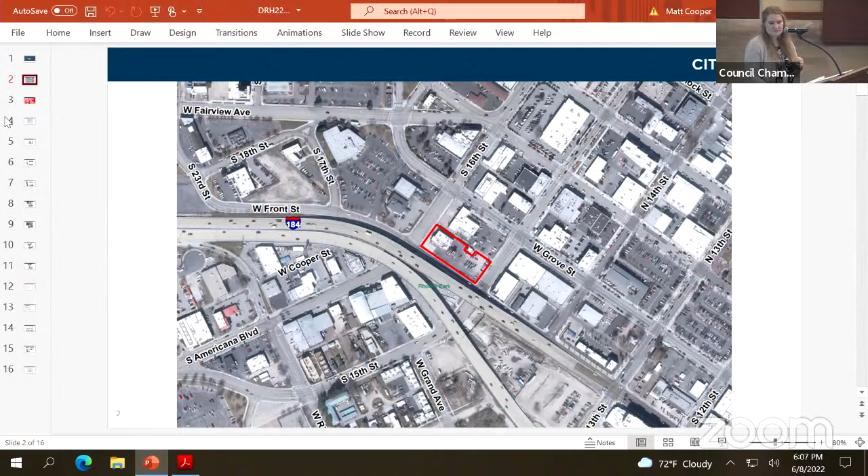The staff could please make their report. Thank you, Mr. Chair and committee members. This is an application for a new 2-story fire station, located at the northeast corner of West Front Street and South 16th Street. The property is in the downtown planning area. The existing fire station building is being replaced by this new building.

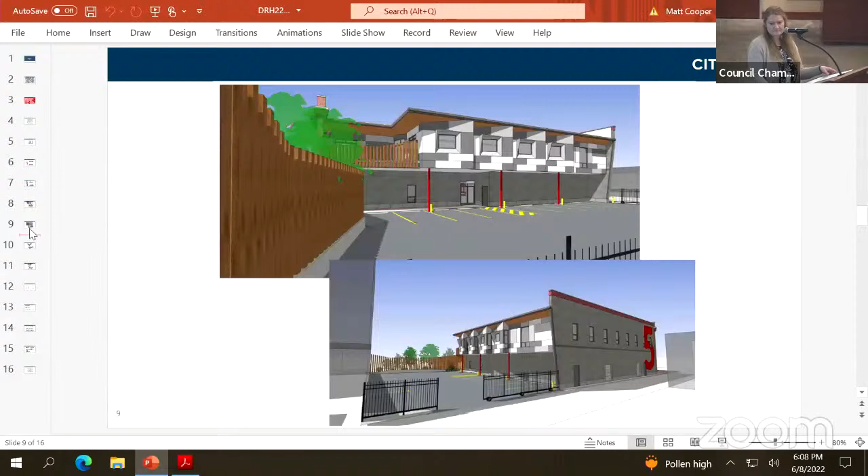Looking at the site plan, the fire apparatus bays are taking access off of 16th Street, and there is some surface parking on the east. The building design and materials include some traditional as well as contemporary details that reference the original historic building. With that, I will leave it up to the applicant to give their presentation.

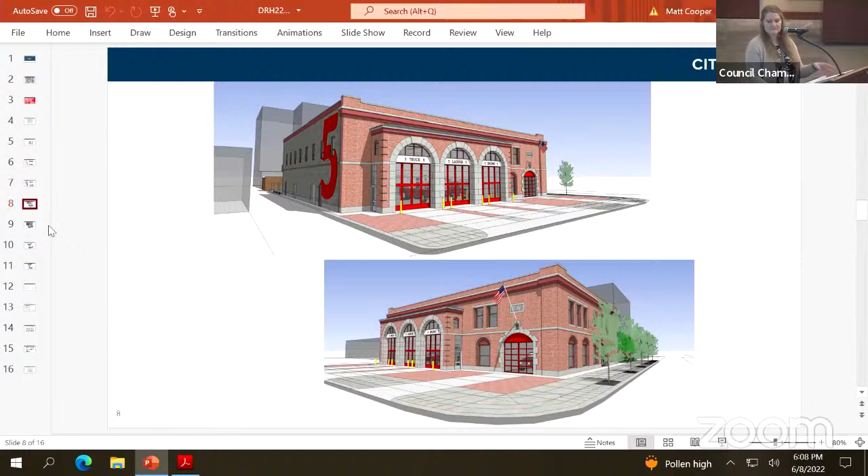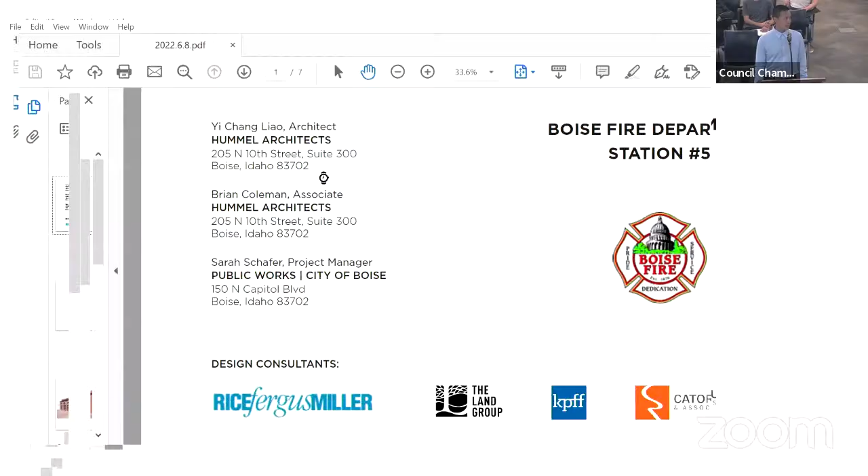If you would give your name and address before you get started for the record. Thank you, Mr. Chairman and members of the committee, and thank you, Kathleen, for the introduction. My name is Yi Chang Liao from Hummel Architects. Address is 205 10th Street, Boise, Idaho. We also have Brian Coleman, associate of Hummel Architects, and Sarah Schafer, the project manager of Public Works, here tonight.

Next, please. So as you know, the project is located at 16th and Front Street. Due to the limited size of this project, the apparatus bay has to have backing for 3 fire trucks.

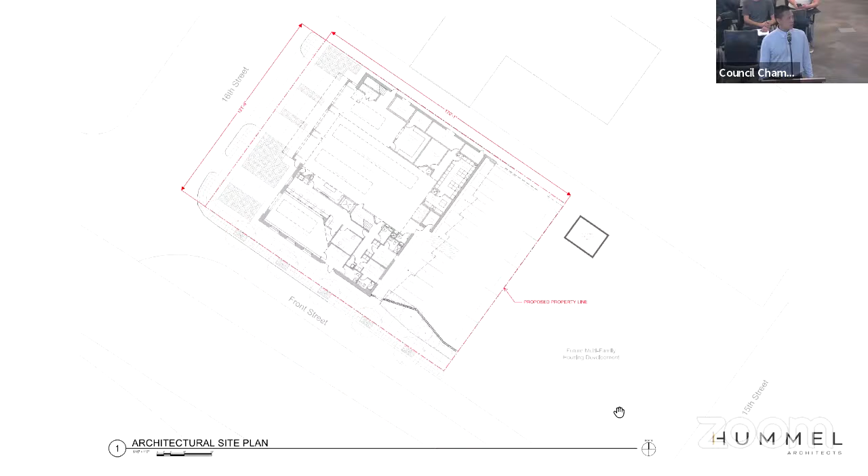So the fire crew is seeking to evoke the memory of the old central fire station. The frontage of 16th Street and Front Street has a familiar brick pattern, and the rhythm of the windows and arch openings brings back the memory of the old central station. At the busiest corner of this junction, it also has a public display hall housing an antique fire engine with several artifacts. This will draw public visual interest, and it integrates with a herringbone brick paver to serve as a public civic plaza.

Next, please. On the interior side of the lot, on the second floor, there is a residential space for the fire crew, as well as a barbecue deck. The contemporary material of two-color fiber cement board will make coherence with the future adjacent housing development.

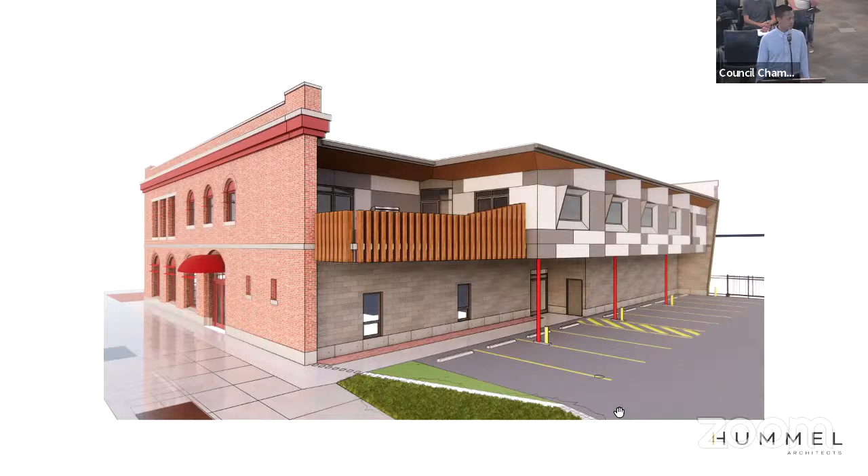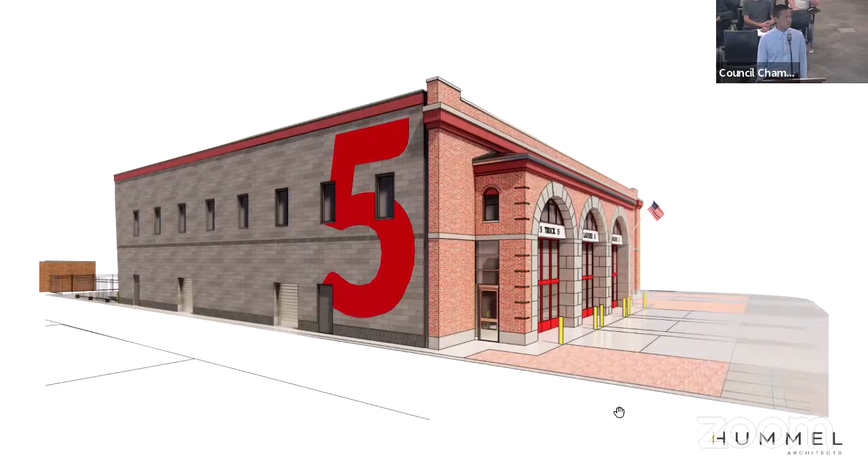This is our first attempt to address the staff recommended conditions. Given the limited size of this lot, we try to reduce the burden on the fire crew. We will locate low shrub landscape planters in front of the historic display hall. Also, to prevent obstruction of visual light in front of the bay, we will only place a historic light along 16th Street. On the interior lot of the site, we will push the property line 5 feet over in order to have a landscape buffer between the future mixed-use development. This is our presentation, and thank you, and open for questions.

Thank you. Is there any questions for the applicant or staff? Mr. Chairman. Yes, sir. I've got a lot to say about this, but I think a lot of it is really not so much questions as commentary. What drove the decision to have the station face out onto 16th versus Front? And why?

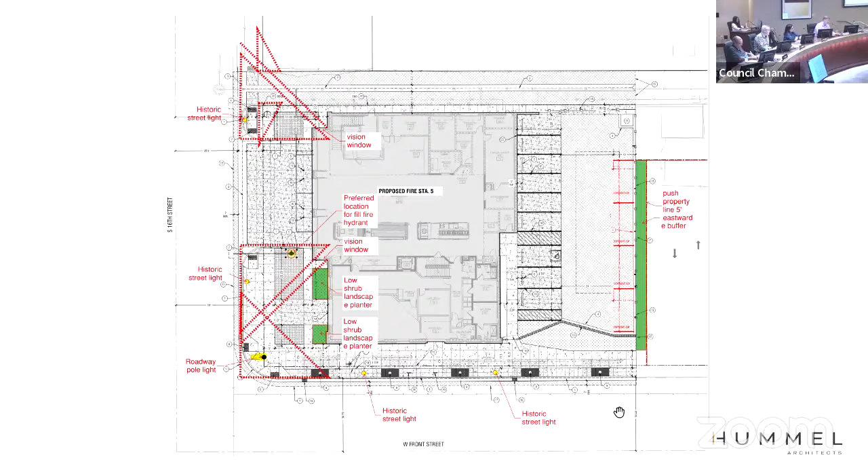I'm not sure which question there is - like I said, a lot of this was more commentary than questions. But I think there's just a lot here that is not up to snuff. I don't think this adequately addresses some of the challenges that this neighborhood has. And we've got this plaza out front that is pretty much desolate, without anything to make it habitable. I guess there's a low shrub landscape planter, but otherwise it's just pavement, which is barely an improvement on what's already there. I guess it's better than cracked asphalt, but...

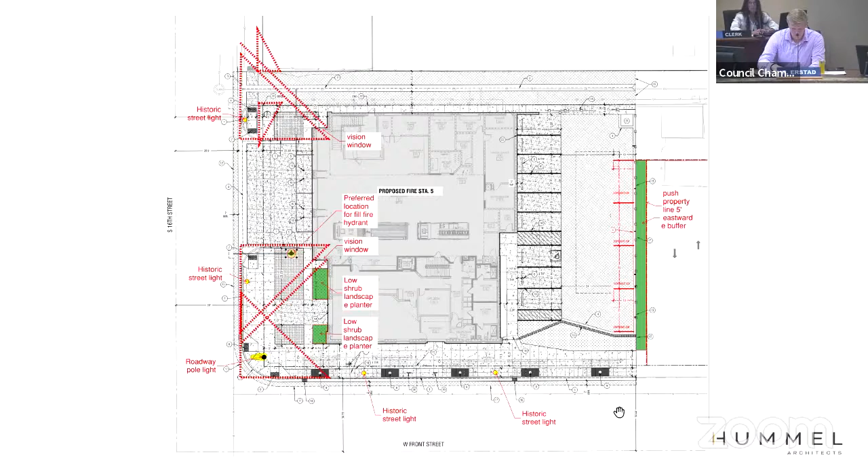I'd like to hear what other members of the committee think about this. I'll go ahead and let the applicant respond to your comments.

You mentioned the surface parking - due to the undetermined mixed-use housing units beside it, in the future it might play a role with future development. You probably won't see it for now.

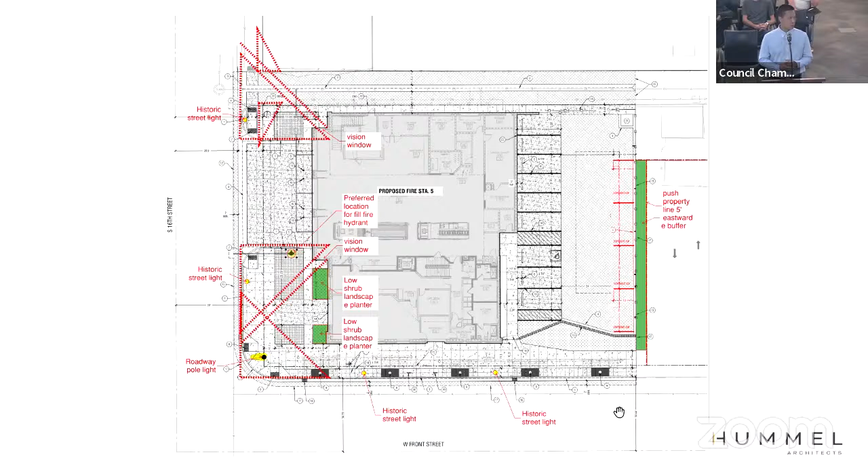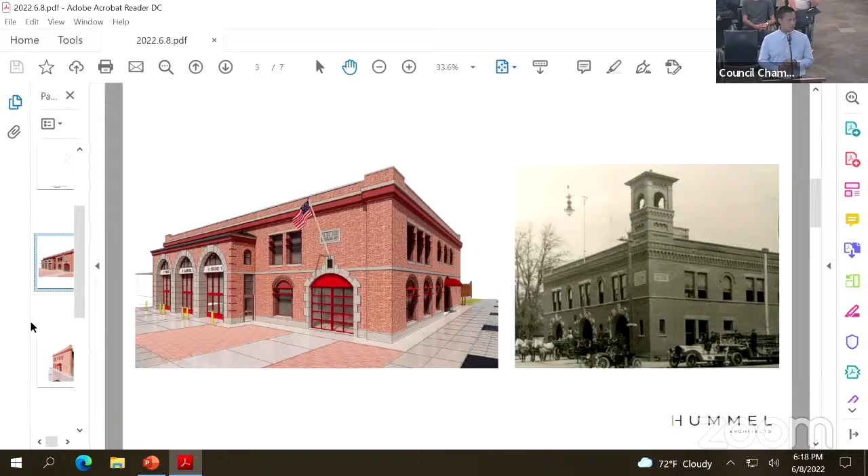And regarding the brick pattern, the rhythm, and the detail of the brickwork, we do try to achieve that using a more contemporary approach. For example, the precast concrete lintel and the precast articulated arch. We try to use a more modern and thermally efficient way to make this fire station more energy efficient.

You also mentioned the tower. We understand this is a new fire station, and given the economics of the current day, it might reduce our ability to construct a real tower in this project. So that's my first response to the member of the committee.

Any other questions or comments? Mr. Chairman? Yes. It seems to me like I have some comments, but I feel like I should wait until after all the procedures - is that correct? Either place is fine; if you want them to give a response to it, this would be the time to say it. Okay, I'll wait. Any other questions or comments? I'll wait until after. Thank you.

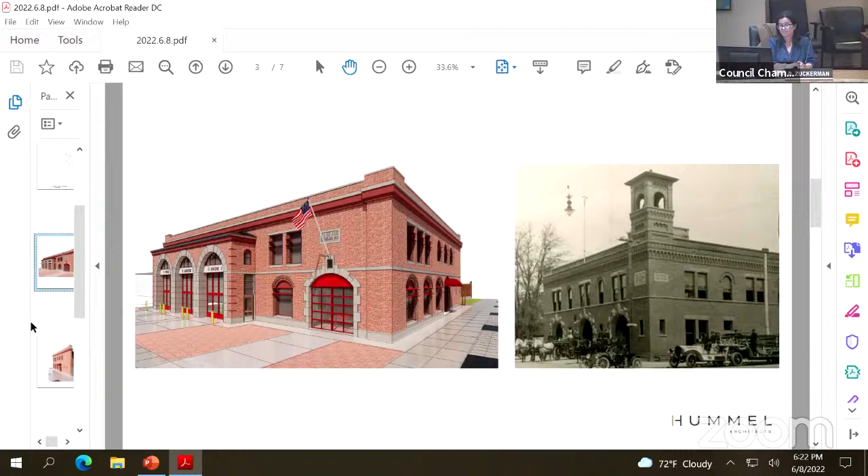Thank you. Any other comments? Mr. Chairman. Yes.

I'm probably the only one on this panel, and maybe in this room, old enough to know and have been around the older fire station. I grew up in that neighborhood. Actually, I spent a lot of time a block away in my grandfather's boarding house to the west of this building, so I spent a lot of time in that neighborhood.

At the time that original building was built, it was probably the only fire station in town, and it had to have a certain monumentality. Being at that location in the heart of downtown, it needed a little bit more prominence than where this current site is. The site to the north of that former building used to be a residence, so the other elevations made sense. They carried it all around on the four sides of that particular building.

Looking at this particular project, when I first looked at it, I struggled a little bit with the different looks on the four elevations. But as I sat and thought it through, I realized that probably the north elevation, which has the big letter 5 on it, is on an alley. And sooner or later, the buildings to the north of this particular project are probably going to be gone, and whatever takes their place will probably be a little more site impactful, vertical, and it will be an alley front.

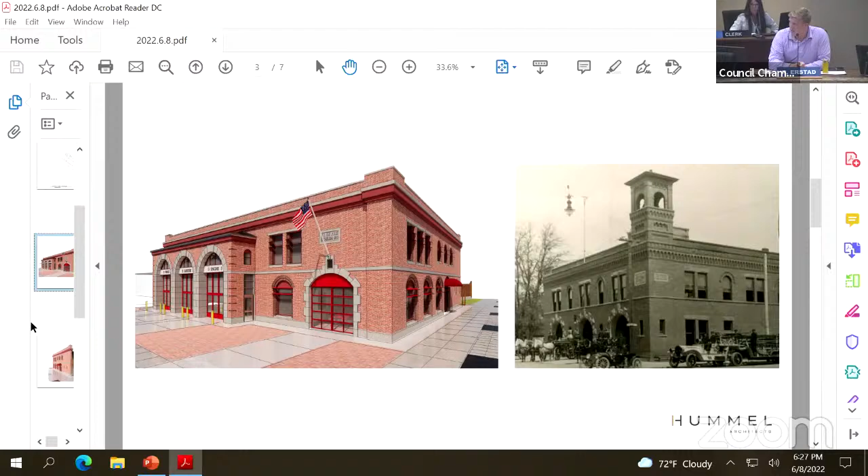Any other questions, or is somebody ready for a motion? I would move for approval of DRH 22-00157 as recommended in the findings of fact, the conclusions of law, and the recommended conditions of approval as noted in the project report. Second. Any other comments or questions? Seeing none, call the roll, please. Rudin, aye. Sabala, aye. Zuckerman, aye. Erstad, no. Three in favor, one opposed.

Motion carries. The next item up for discussion is DRH item number 5, DRH 22-00163, construct a new 7-story multifamily residential building with 104 units, structured parking and ground floor amenity space on property in a C5 DDDA zone.

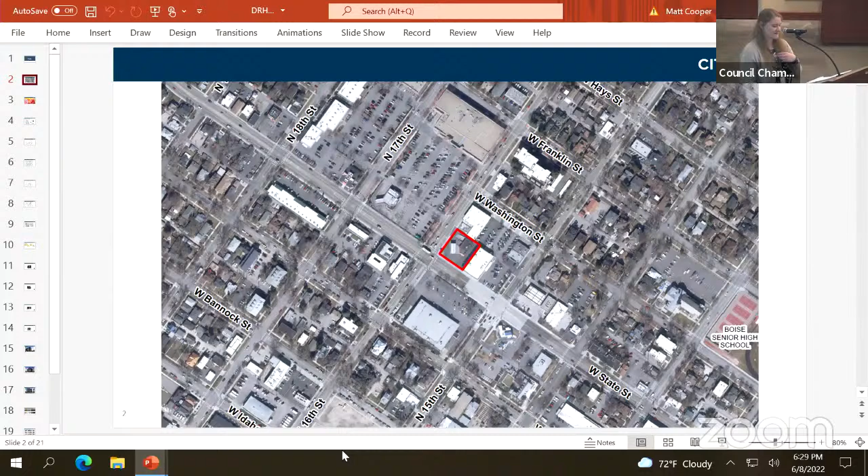This did go through a rezone with a development agreement. The rezone was CAR 20-00019. And then after that rezone occurred, they did come back to P&Z for a parking reduction due to discovering a sewer easement that required them to remove quite a bit of their parking. And that parking reduction was approved.

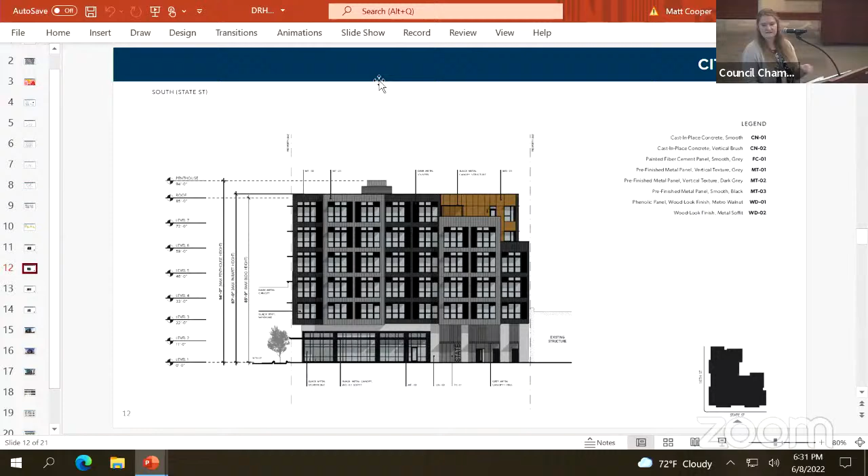Thank you. I'll turn it over to the applicant at this point. And once again, state name and address for the record, please. Hi, Ben White with GGLO, 1199 Shoreline Lane.

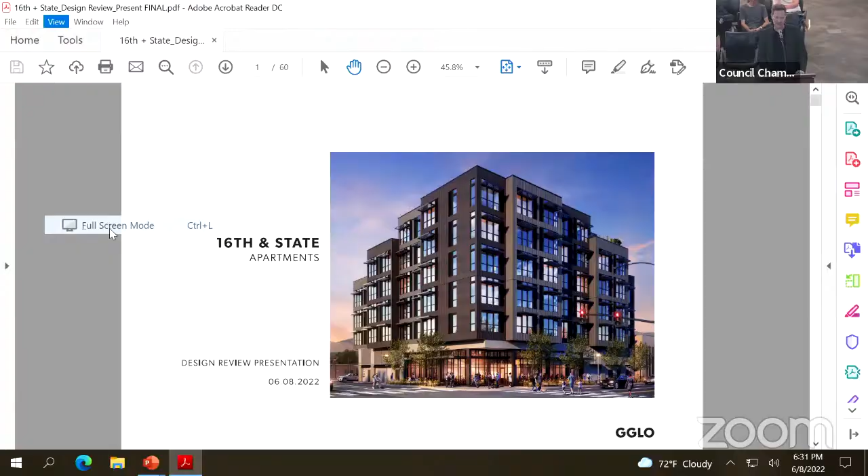Thanks, Caitlin, for your presentation and the thorough report. As she mentioned, we are in agreement with the recommendations and the conditions of approval. So we'll keep our presentation fairly brief, but we did want to talk a little bit about the why behind the development and the design of the building.

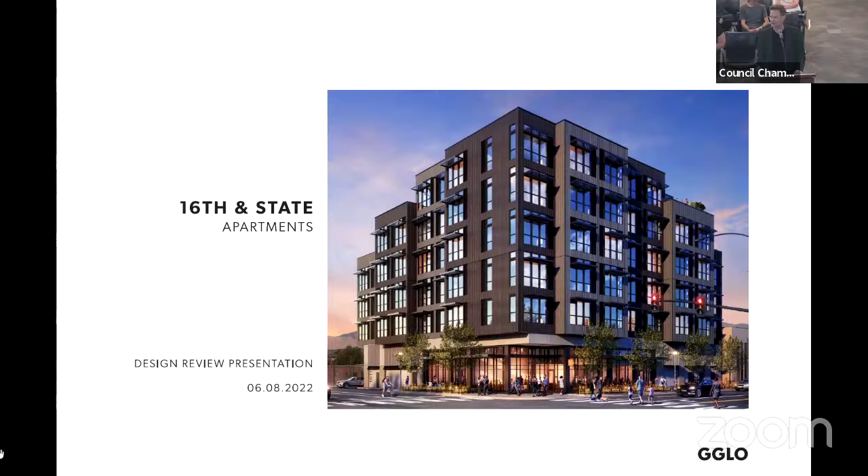Next slide. As she mentioned, there's been a bit of history to get us to this point over the last couple of years. We worked through the rezone with the development agreement, which set some of the overall limitations of height and number of units for the project. And then the subsequent conditional use was approved.

The overall development vision for this site really grew out of that recognized need that we're all aware of for more affordable housing near downtown. And this site is really a prime location to bring that housing to downtown and really coincides with a lot of the city's development goals. Next slide.

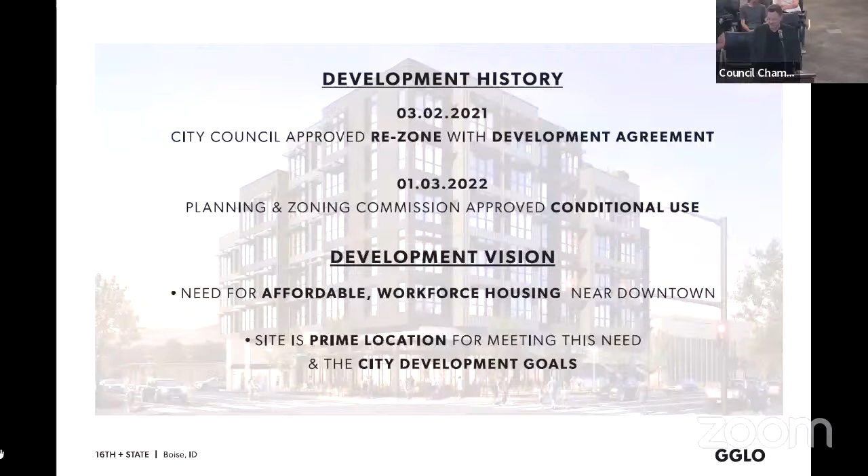So as you can see, as you're probably familiar, it's located at the corner of 16th and State, adjacent to a number of principal arterials. It's at the edge of the downtown core, kind of the transition zone to the more single-family residential neighborhoods to the north and the east, but incredible walkability to a variety of services, jobs, different other amenities. Next slide.

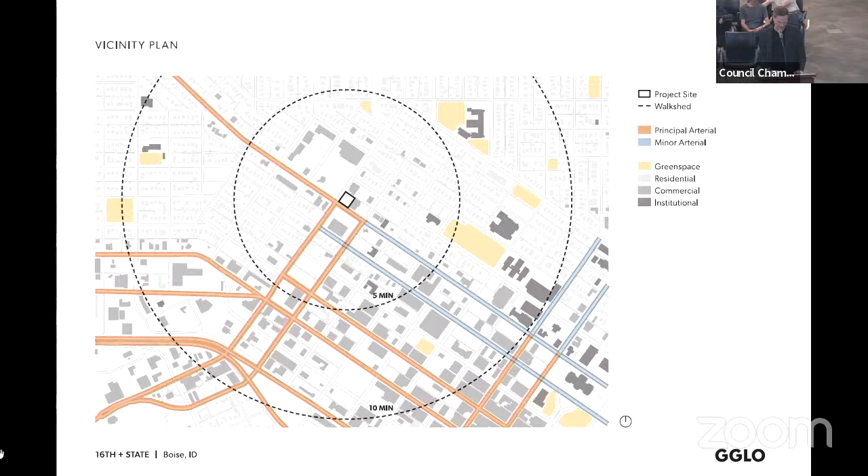And it is in the downtown planning area, just right on the edge of it, as well as the existing Westside Urban Renewal District, and it fronts on the State Street Priority Corridor. Next slide.

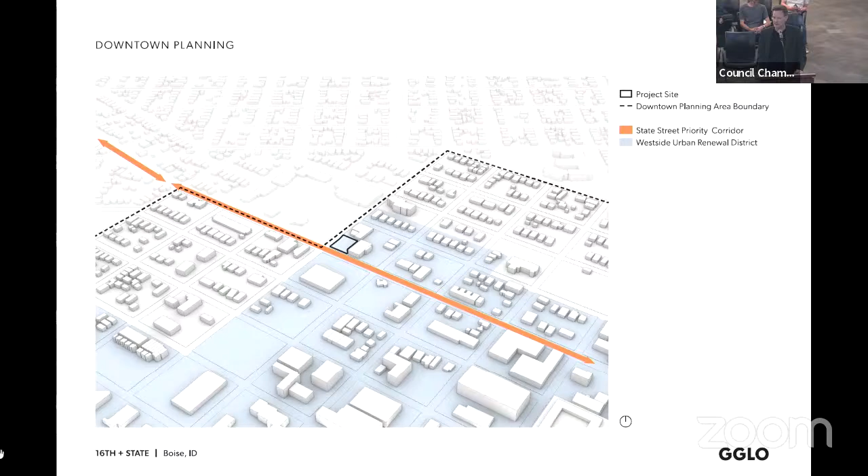And being on State Street, there are great opportunities for transit access with the existing bus stops, the secondary transit station plans at 16th and State, as well as the well-established existing bike lanes on either side of the block going in a variety of directions.

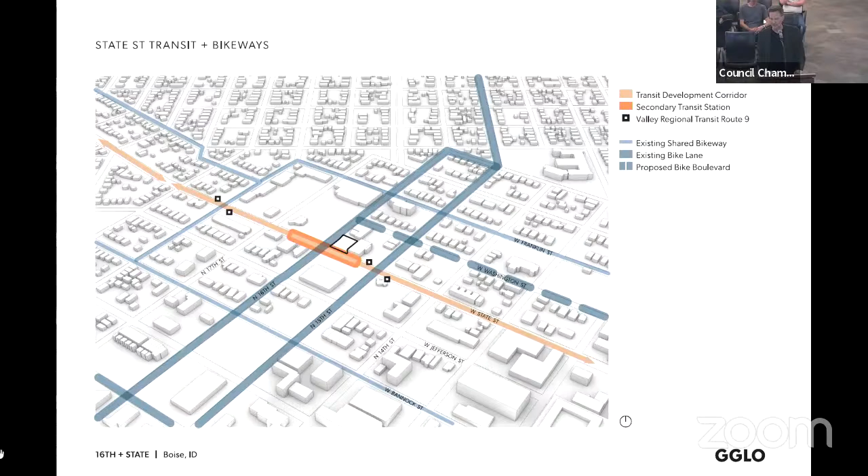Next slide. Yes. So really, when we look at the goals of Blueprint Boise and the aim to provide higher density infill development, provide more workforce housing near those transit corridors, and with great walkability to downtown jobs and services, this aligns really well with that.

State Street corridor as well, there's providing more transit-oriented development, providing that missing middle housing near those transit stations. And then with the North End neighborhood plan, looking at those underutilized areas, particularly along State Street, the southern edge of the North End neighborhood, where there's potential activity centers that are currently pretty undeveloped, such as this intersection and the one a block to the west.

The goal specific to this development is to provide compact development near the downtown core. We wanted to create layouts that are very efficient, to create higher density and increase the number of available apartments, really maximize what we could do on the site, take advantage of those connections to the transportation corridors and the bike lanes. Along the frontages, our goal is to create pedestrian-oriented spaces with active uses and lots of visibility into the interior, overall contributing to that pool of diverse and affordable housing.

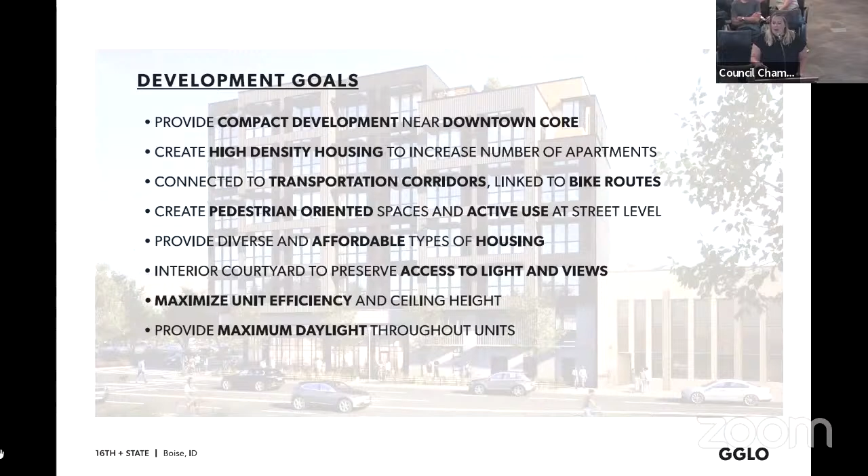As Ben mentioned, at the ground level we have our active uses really focused at the intersection, lots of glazing and visibility associated with retail at the corner, as well as a lobby adjacent to 16th Street. We also have a sizable bike room associated with the pedestrian realm, and also emerging transit use in the area.

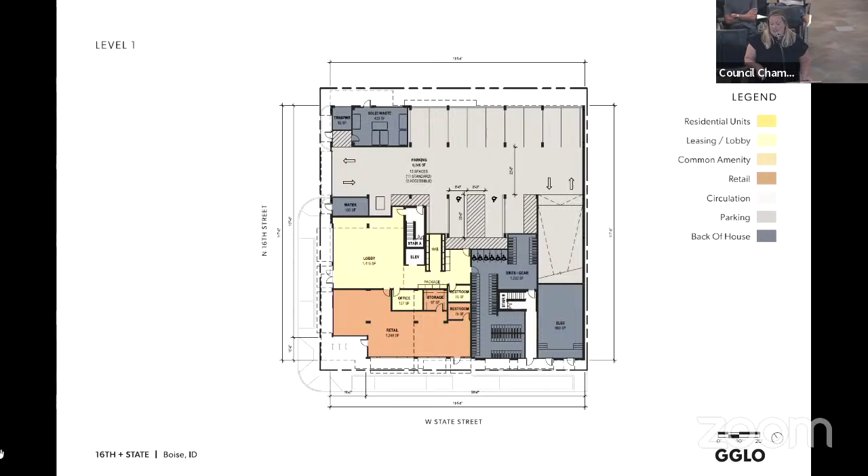As we move up through the building, you can see that floor plan starts to step back. I think one of the key defining features of the building is the way that it steps down to meet lower-lying development and also the residential context to the north.

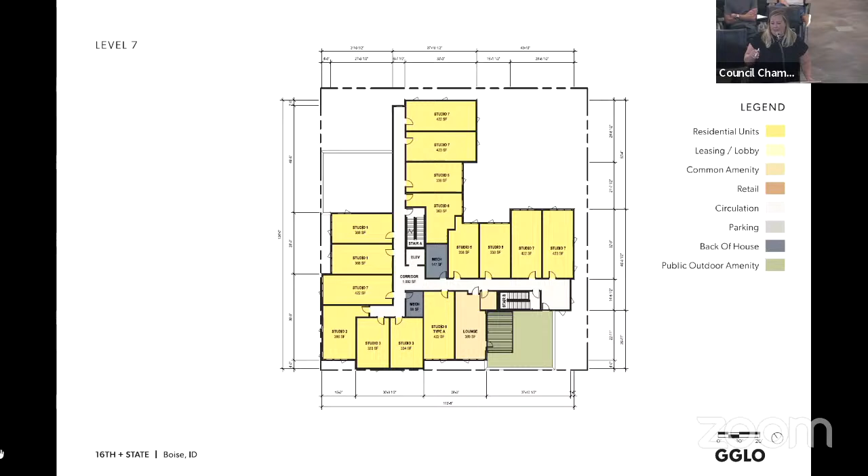Finally, at the upper level we have a residential roof deck oriented with an amazing view to the Capitol building. You can see how that massing is increasingly condensed at the upper level.

You can see our two levels of structured parking oriented towards the alley. As we move through the elevations, I can show how we have treated that facade to screen it from view, but also provide natural ventilation.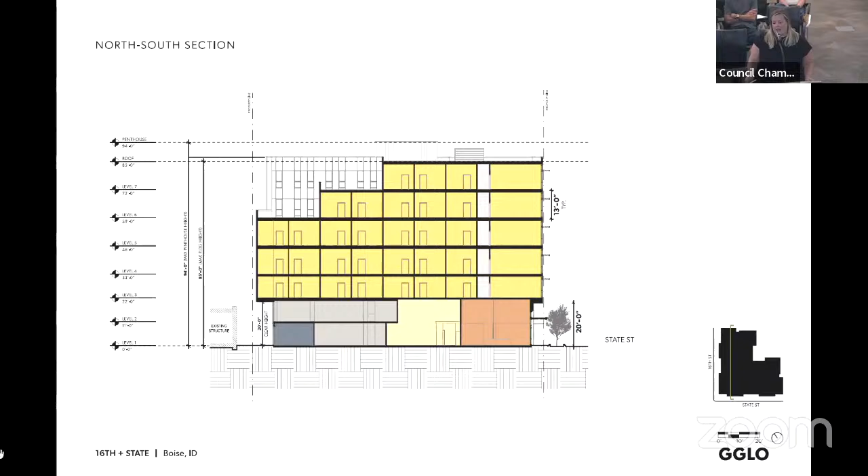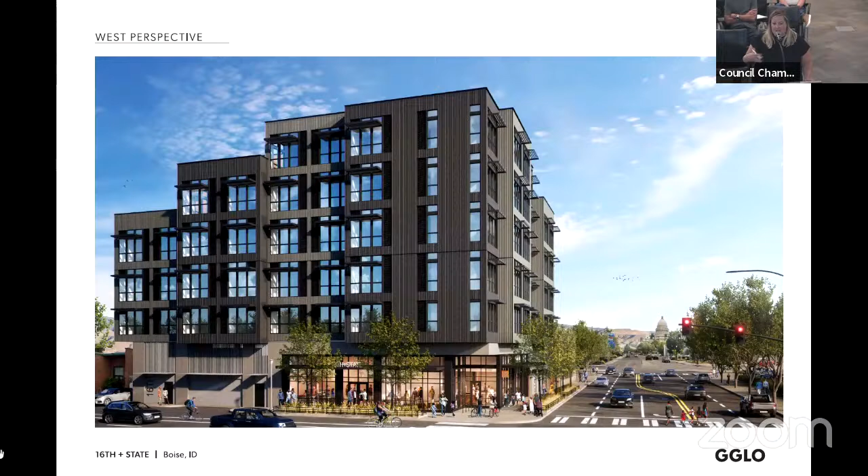This brings us around the corner. I think it's also important to note that the 13-foot floor to floor allows for really tall glazing that helps enhance the livability of these units, but also creates a really striking elevation that presents out to the city and the street.

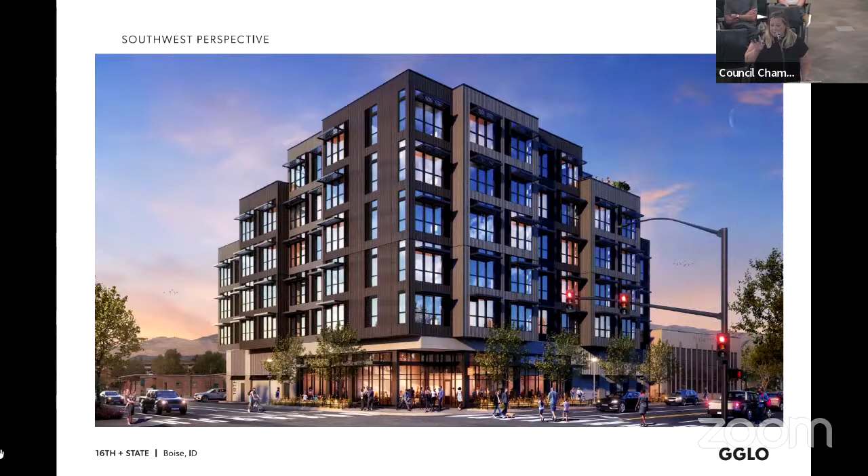We've also included some sunshades that help mitigate solar gain on those large windows. As you can see, also the roof deck that's oriented towards the Capitol building.

Next slide, please. This is a great view for highlighting some of the wood toned accents that we are integrating, both in the areas associated with the corridor where the building steps down, as well as at grade, creating a wood tone soffit at the primary weather protection for days like today.

If you could go back - I just wanted to point out the screening that is very much integrated with the facade and placed in such a way that it complements, very intentionally, the strength of the concrete frame that highlights the retail at the corner. Next slide, please.

I just wanted to share some of our inspiration photos, pairing that more neutral palette that's helping to define those really simple and clean volumes with some pops of a more warm material to just emphasize livability and warmth of the project. Next slide, please.

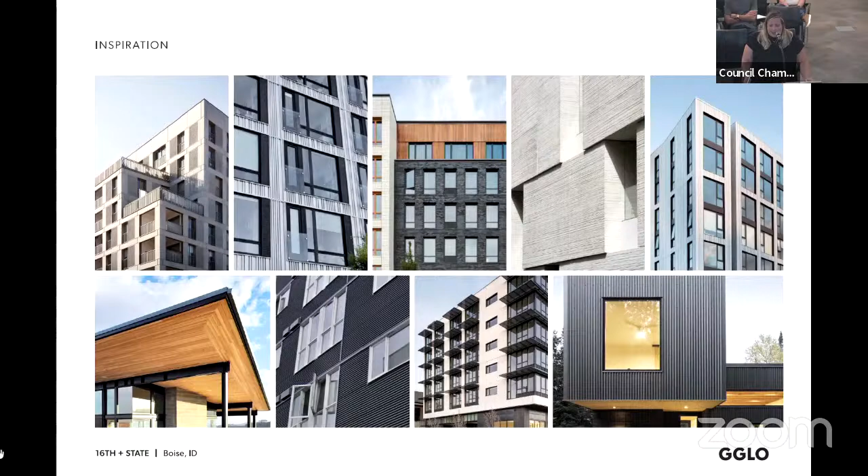A little more information about our material palette, showing the Stonewood that's proposed at those upper levels, as well as a pre-finished metal panel. It's chosen for durability and also just high quality, frankly. Then showing the wood finished metal soffit, as well as the concrete finishes proposed for the project.

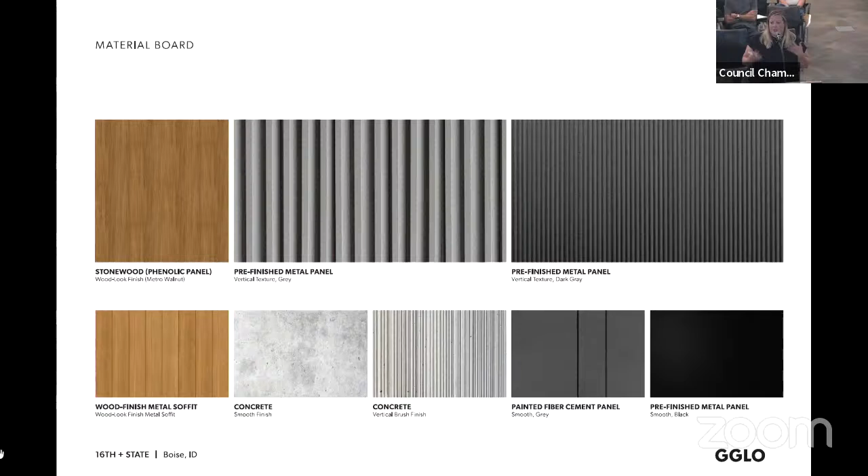The pre-finished metal panel and fiber cement also help, as the project wraps around the block, those are integrated as well. Next slide. And we'll take any questions. Thank you. Thank you very much.

Any questions for committee or for the presenter? Could you go into - you may have touched on it, but I didn't see it in the materials at the very end - the screening method for the parking garage.

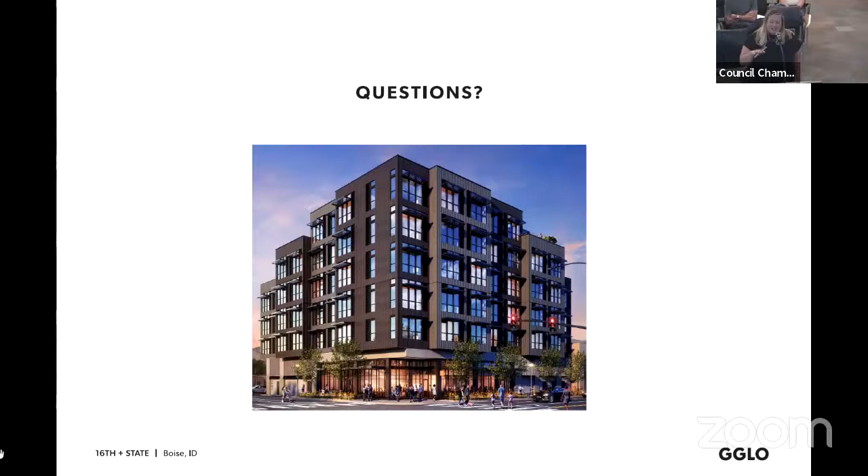Absolutely. I think some of the perspective views show it well. The intent is that it's just a painted metal fin that is monochromatic, so blending in with that concrete finish. So it provides a bit of texture and also references the verticality of the material used above.

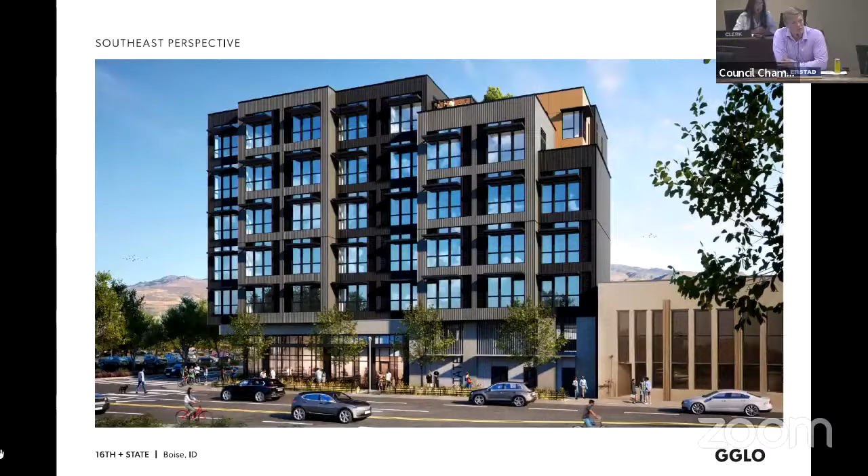So there's a feeling of that kind of movement transcending the podium. Thank you. And for staff, looking at the entrance onto 16th Street - there we go. It might actually help to have the site plan.

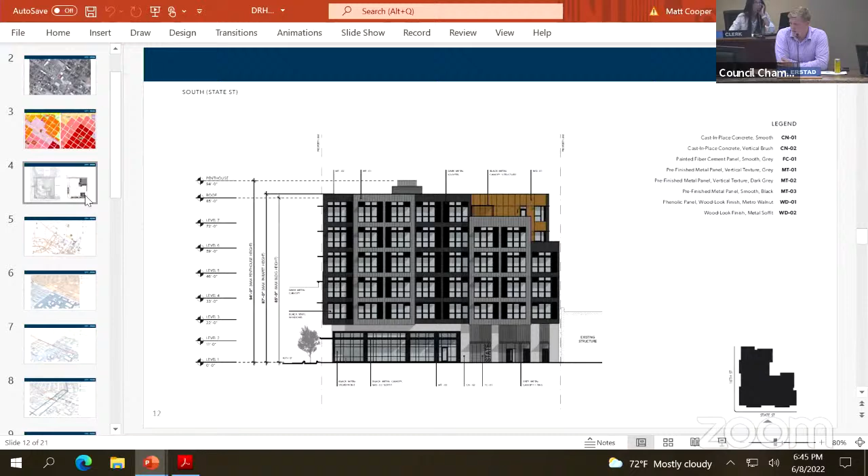So it's got that material difference, but it also shows the curb only coming off the face of the building there, between the alley and the entryway, by probably about 5 feet. That doesn't seem like there's really a lot of precedent for that within ACHD standards. Is that something that has many standards attached to it, or is this kind of a unique condition?

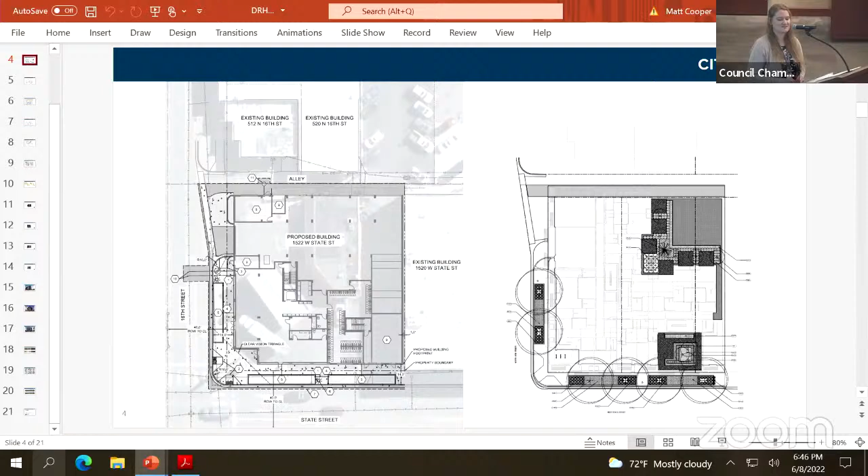Mr. Chair, Committee Member Erstad, this is a bit of a unique area because of that turn lane there. And this access is already sort of existing on the site, so the applicant is narrowing the access and reconstructing their drive access as well. Then we have the situation where there's that alley that's not really an alley anymore, but it's kind of being used as an alley. So we do have a lot of strange circumstances coming together, but ACHD has not indicated that this is an issue.

Thank you. Any other questions for the applicant or staff? Is there any member of the public that would like to testify on this, online or in person? Seeing none, I'll close the public portion of the meeting and open it up to staff discussion.

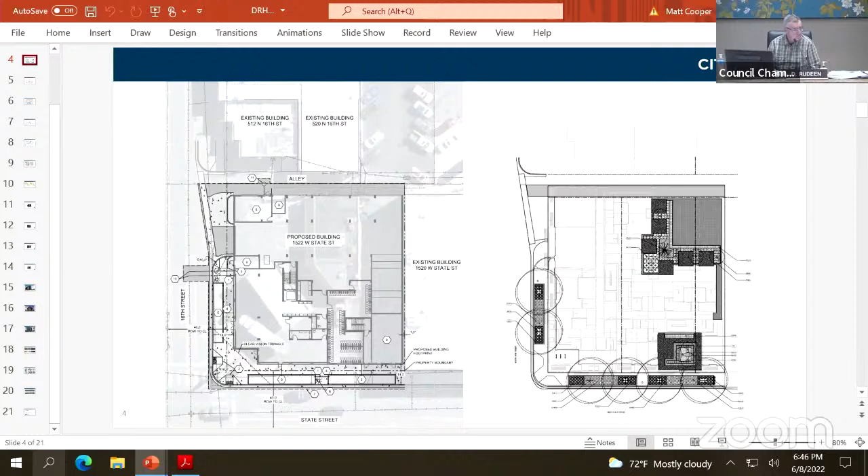Mr. Chairman? Yes. I will speak directly into the microphone as instructed. I'm crazy excited about this building and live very close by and have been watching it carefully. I have a criticism for our standards and a compliment for the building.

I am not a fan of varied roof lines, which we often ask for. And this varied roof line is the first time I've seen one that actually makes sense, that it doesn't look like it's forced and doesn't have this whole up and down thing like it's almost a castle, but not really, creating its own skyline where it doesn't need one. But this makes sense that it's as tall as it can be and steps down toward the neighborhood, and I think that was a great use of that.

The same thing with the undulating facade, or at least the variation in the facade.

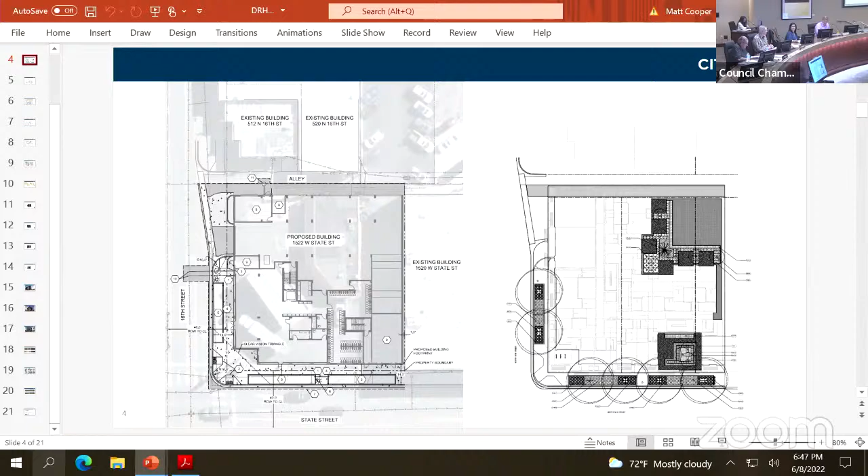So I'm from Chicago and I like really tall buildings, and often the John Hancock Tower and the Sears Tower, they make sense and they're just straight. And then I moved out of Chicago and saw that nobody else does that. Well, New York does that, but Boise doesn't. And here, I almost want it to be flat, but it makes sense because it's on the edge of a neighborhood, so the building can't look any bigger than it is. I know you guys have been through a lot with neighborhood suggestions, recommendations, input, feedback, whatever. So I think this is the best I could possibly hope to see for this site.

And I think it's a beautiful building, and I love that you left the corner to be activated by something retail, so that it feels open to the whole neighborhood and not just for those going into the lobby. I think it's going to raise the design standard for whoever builds tall next in the area, because more of this is coming. It might get some residents thinking, oh, we don't have to settle for mediocrity, we can do something cool like this. So thank you for raising the standards.

And I can't wait to see it built. I love that we're design review, not planning and zoning, and we didn't write Blueprint Boise, but it's a huge bonus that it both complies with and forwards the goals of the city in general, with housing more people in an already dense area. So thank you and kudos.

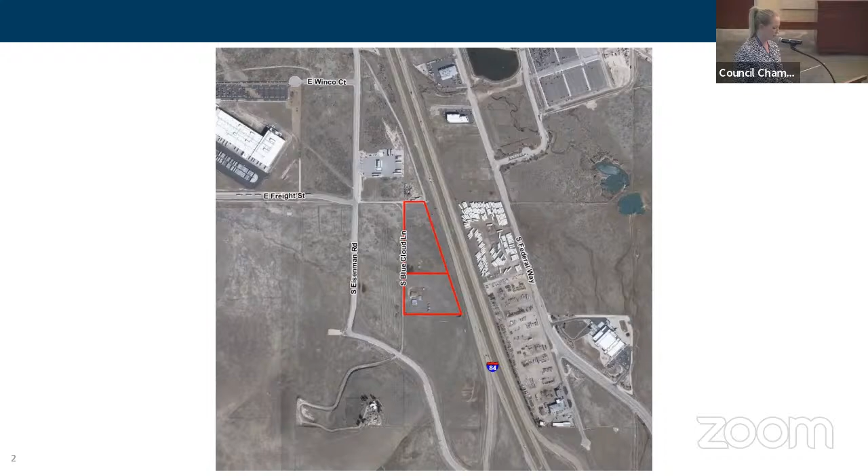The applicant proposes to construct 12 new self-storage buildings and 2 accessory offices. RV parking is also proposed. Access will be off Freight Street, which will be extended into a private access road constructed along the north and heading around to the east side of the site toward the south for a second entrance. Both entrances will be gated and a sidewalk will be constructed along both frontages. Parking and bike racks are being provided near both entrances adjacent to the front office buildings.

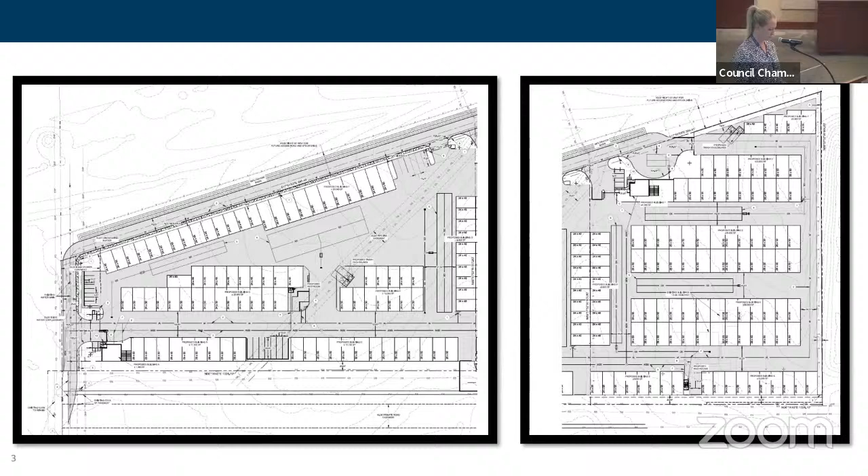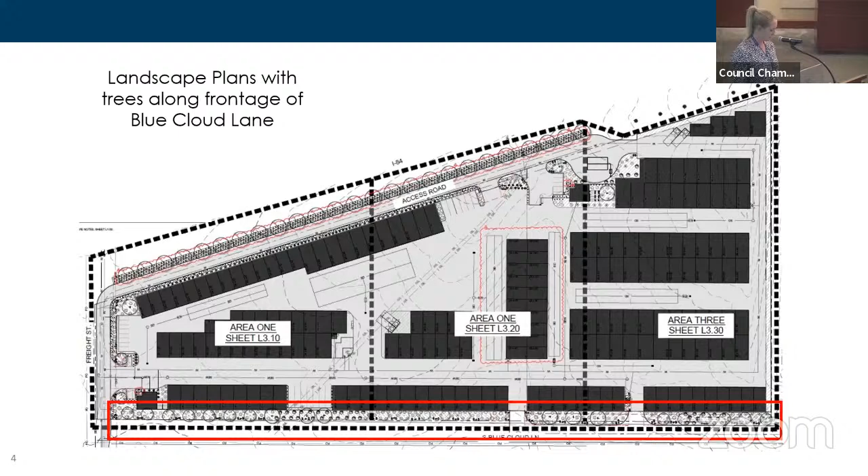The applicant originally proposed street trees along Freight Street and the private access road facing I-84, and along Blue Cloud Lane. However, since Blue Cloud Lane will eventually no longer be a road according to future transportation plans, the trees along that frontage were removed. This shows the trees removed along that frontage, with the change happening on the west side of the site and no other changes to the rest of the landscape plans.

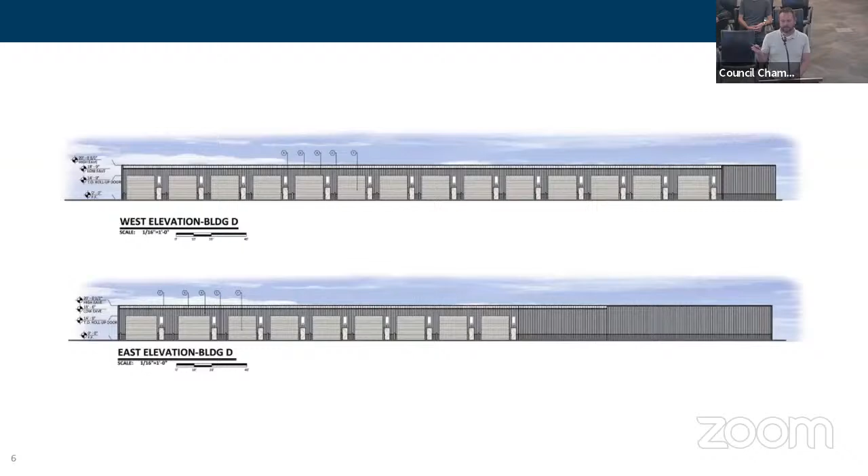David Sterling with TO Engineers, 2471 South Titanium Place in Meridian. I'm filling in for Alec, who was listed as the applicant. We're in agreement with the staff report. We did just make that last minute change on Monday with the landscaping because Blue Cloud Lane will go away, so we wanted to remove all those trees we had proposed on that side. That's really why we asked to be off the consent agenda, so we could get that change in. With that, I can answer any questions you may have.

Thank you. Any questions for the applicant or staff? Mr. Chairman, it wasn't clear to me—is the RV parking for storage, or parking for people to live in an RV? No, it's all storage. So all the storage is internal, there's no outdoor RV parking. Thank you, that helps.

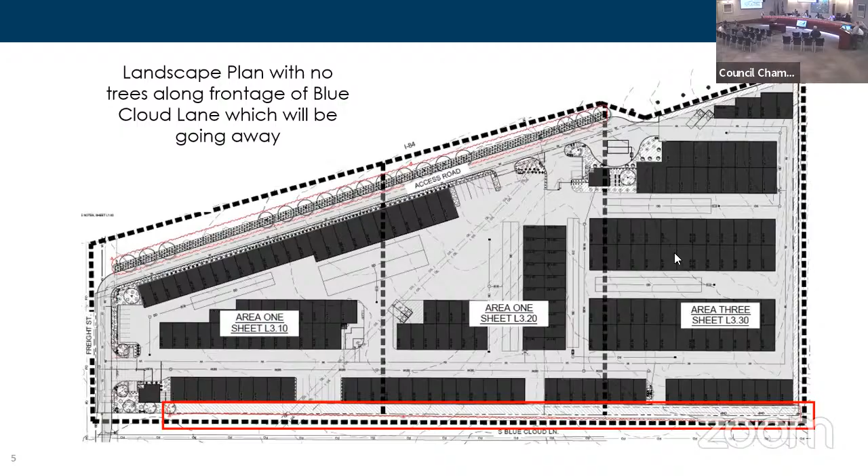Any other questions? Thank you very much. Is there any member of the public or online that would like to make a comment or testify? Seeing none, I'll close the open portion of the hearing and let the staff discuss it and create a motion.

Any discussion? Or a motion? Yes, Mr. Chair, I believe there are several members of the audience that said they were here to testify against this, or is this—no, no, sorry, it's the next one. It's the next one, apologies.

In that case, I move to approve DRH 22-00164 and DRH 22-00165 according to the recommendations and requirements, conclusions, and findings of fact and law noted in the project report. Second. Moved and seconded. Any further discussion?

Mr. Chairman, I just want to say that I'd like us to build more beautiful, thoughtful buildings, but I also recognize that this is a self-storage building and a place to house RVs, and I'm not sure it makes sense to ask more of the applicant than what they're doing. So given that, I'll support the motion. Any other discussion? Seeing none, I'll ask for a roll.

Rudine, aye. Sabala, aye. Zuckerman, aye. Erstad, aye. All in favor, motion carries.

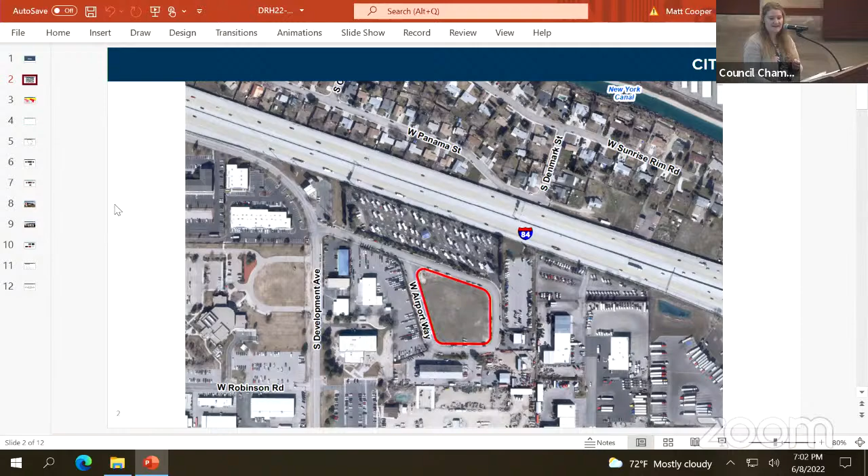Thank you, Mr. Chair and committee members. This is a request for a new hotel building located on Airport Way. It's actually kind of unique because it's encircled completely by this terminus of Airport Way, so we're located near the airport. The applicant's going to be providing new public sidewalk along the entirety of the site. You can see that in the updated site plan, proposing that sidewalk all the way around. The applicant is in agreement with all the conditions of approval, and I believe the applicant's here if you'd like to hear the presentation.

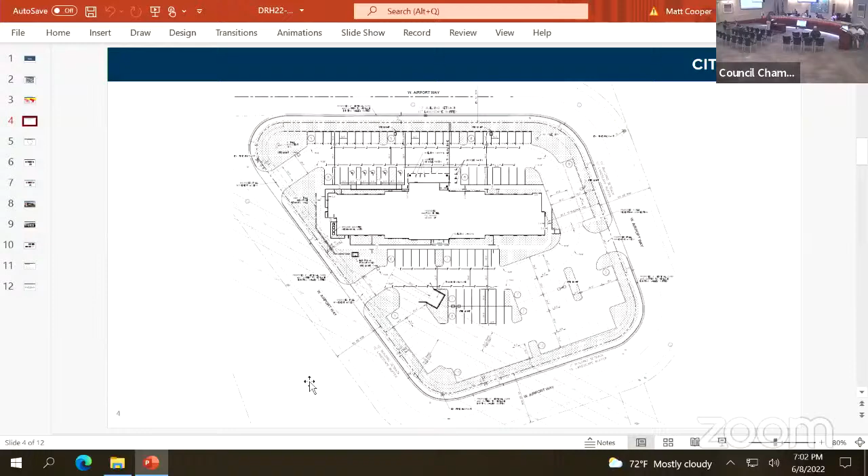Thank you, my name's Connor Candry and I'm with Kimley Horn, at 1100 West Idaho Street in Boise, Idaho. You can go to the next slide right away. Thank you.

So I also have Colin Thompson on the Zoom call, who I will tag in to talk about the architectural standards on this project. This is the rest of the design team. Next slide, please.

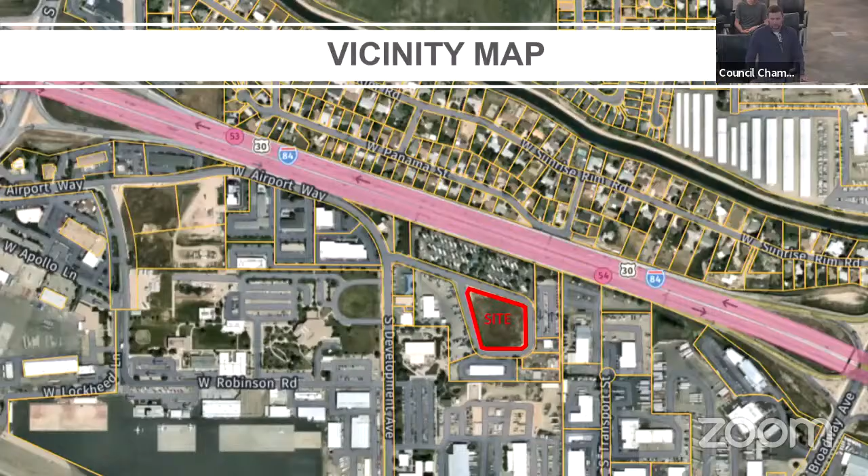As staff had mentioned, this site is quite unique. It's close to the airport and fully enclosed by West Airport Way roadway. Here's a site plan, we can reference that if there's any further questions. Landscape plan.

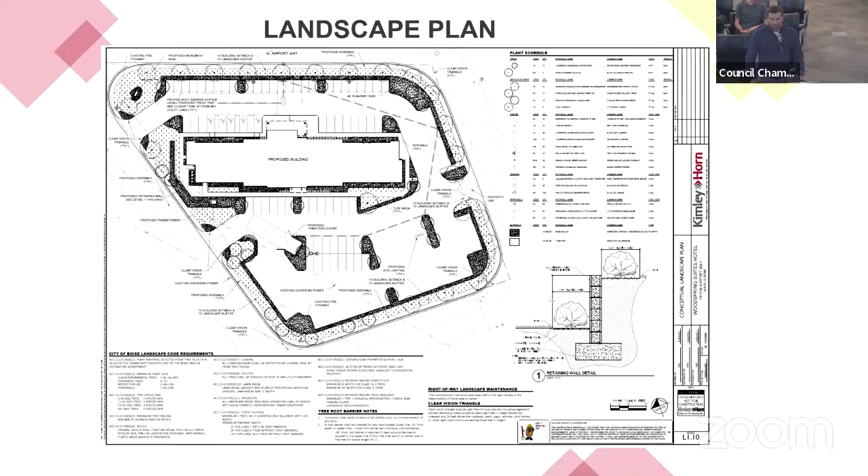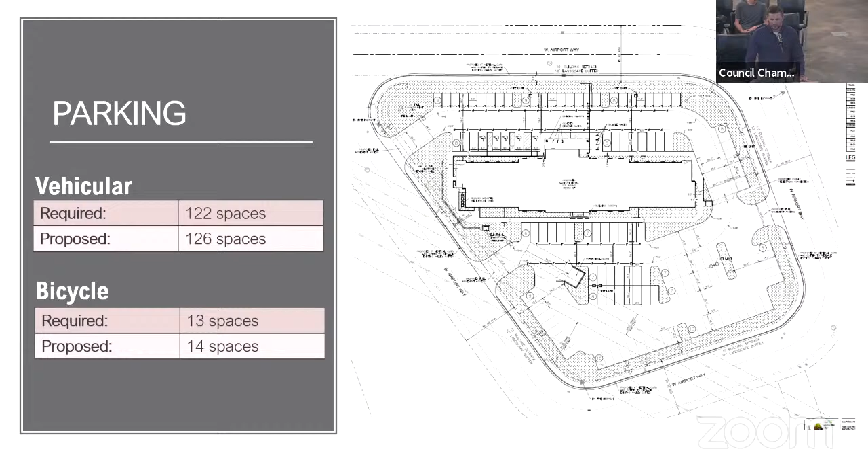From a parking standpoint, we're required to have 122 spaces based on the 122 rooms for this hotel. We are proposing 126 spaces. Bicycle spaces required is 13, and we're proposing 14, 6 of which will be covered by the entry awning.

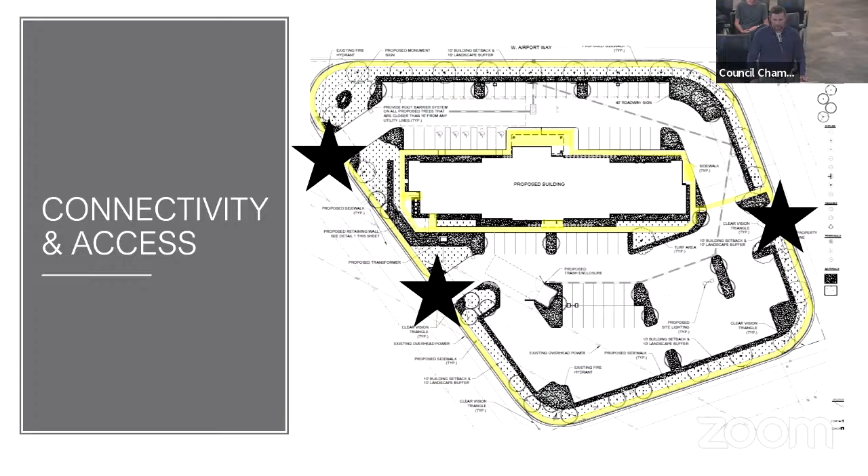Next slide, please. From a connectivity standpoint, as staff mentioned, we are proposing sidewalks around the entire site with a pedestrian connection to the public right of way. And I'm going to pass it over to Colin to introduce himself and talk about the architectural standards.

Yes, thank you, Connor. Can members of the committee hear me? Great, thank you. As mentioned, my name is Colin Thompson. I am an architect with BRR Architecture, and my address is 2200 6th Avenue in Seattle, Washington.

As Connor mentioned, we're proposing a Woodspring Suites hotel here. It is a brand that is geared towards an extended stay market, meaning stays generally longer than 2 or 3 days, but less than 30 days. This brand is affiliated with Choice Hotels International.

The exterior facade is really geared towards a more modern and clean color palette and aesthetic that features a thin brick base banding on the first floor, to ground the hotel project and provide a pedestrian scale and experience for individuals coming in and out of the hotel. Above that brick banding you'll see the proposed materials: lap fiber cement siding in both white and gray color palettes, as well as a wood tone siding, located both over the primary entrance in the orange palette and at our end stair conditions, to tie a little bit of warmth into that color palette as well.

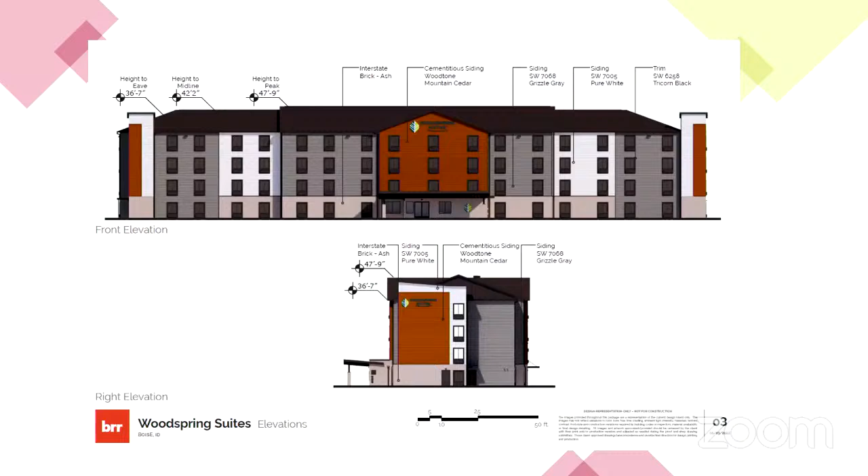We can continue to the next elevations. Again, this shows the breakup of the horizontal banding to provide vertical expression, with the continuation of the fiber cement siding down to grade.

Looking at the first floor of this hotel, as I mentioned, there is a primary entrance lobby for the hotel. There is no food and beverage component to this proposed hotel. However, there is a guest laundry facility included for residents staying at the hotel, in addition to a small fitness amenity room space provided.

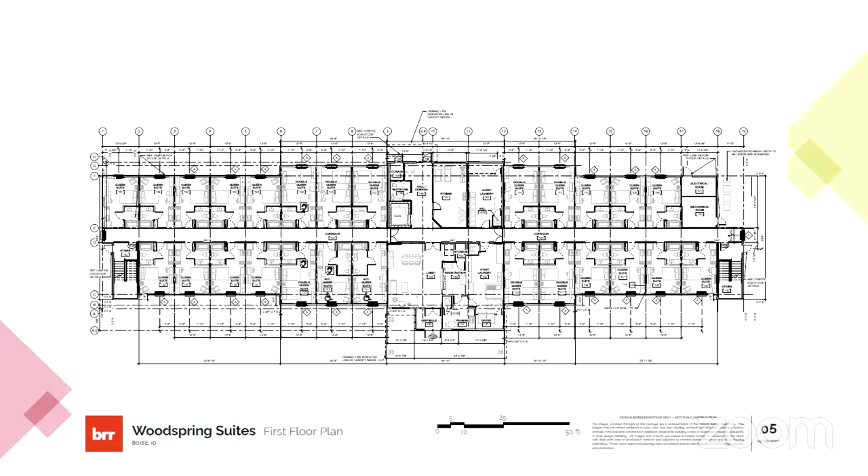As Connor mentioned, if we can go to the next slide, perfect. There are 122 proposed guest rooms in this building. Here you can see the prefabricated metal canopies being proposed over the first floor rear entry, as well as the exits on both ends of the building.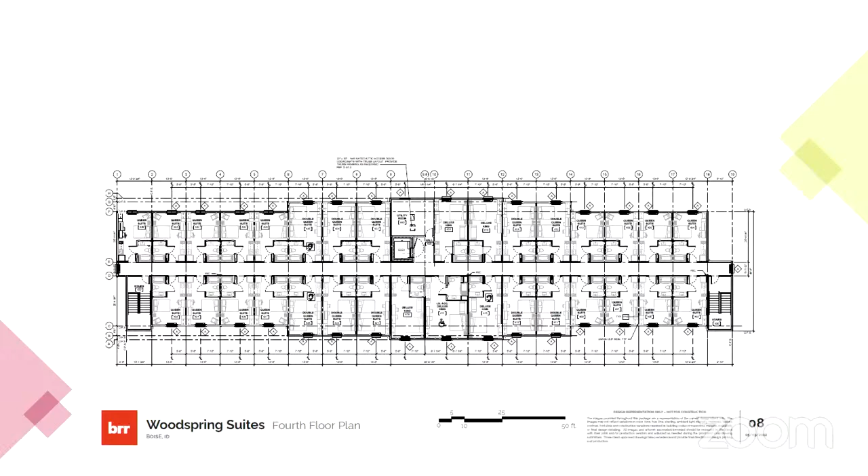As previously discussed, the materials we are proposing on the exterior facade include fiber cement siding, both in white and cool gray colors, in addition to the wood tone, wood look lap siding, and thin brick, cream colored brick base banding.

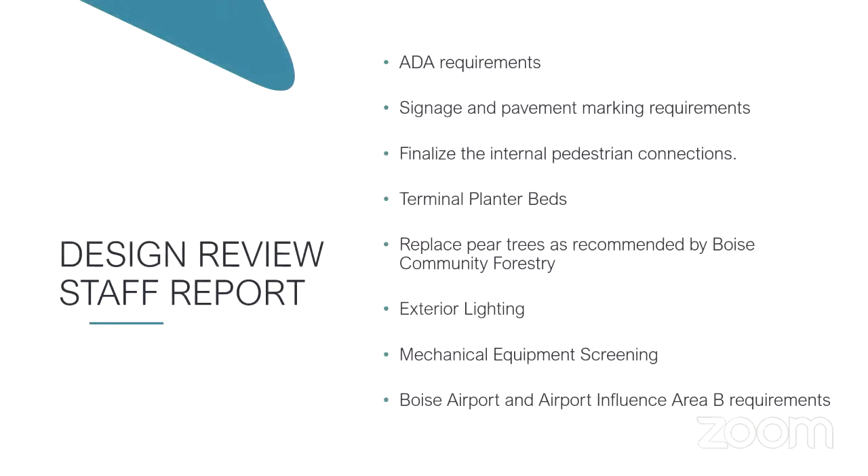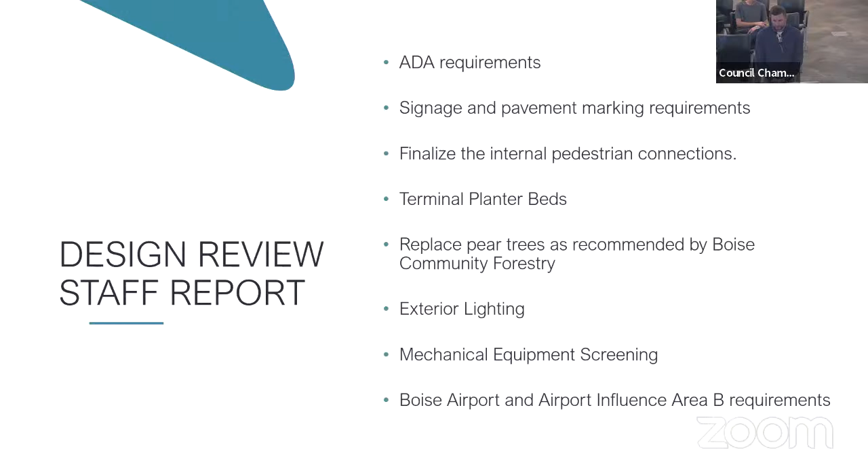These are the conditions that were in the staff report. As a reminder, we are in agreement with all these conditions and are actively working with staff to address them, and we are requesting approval for a design review permit.

Any questions? Thank you very much. Any questions for the staff or applicant? Thank you very much, thank you for your time.

We have Justin Reif to testify. Name and address, please. Justin Reif, representing Mountain View RV Park at 2040 West Airport Way, Boise, Idaho 83705. I understand this is a design review process, however this is our first opportunity to address a public forum and some major concerns that we have.

Any improvement on this site we welcome, we love, we have no issue with the design of this hotel. I think we're putting the cart before the horse here with regards to ACHD and the Idaho Transportation Department as well. First and foremost would be parking issues that we are extraordinarily concerned with.

Yes, 122 units, 126 parking spaces is 1.03 spaces per hotel room. With a longer term hotel stay, you're going to have multiple vehicles per room or per family dwelling in that room, due to the same issues you hear about every single day with lack of affordable housing in the area.

Along the same lines with parking, if you were to tomorrow morning take a break from work, run down Airport Way and look at the other hotels right down the street there, I counted 9 dilapidated RVs parked on the side of the roads this morning, with multiple vehicles staying at some of these longer term hotels, which now create safety issues, sanitary issues, and bottleneck issues. So parking is a major concern for us, as we're going to be a neighbor here. We'd like to have adequate parking both for our facility as well as this hotel facility.

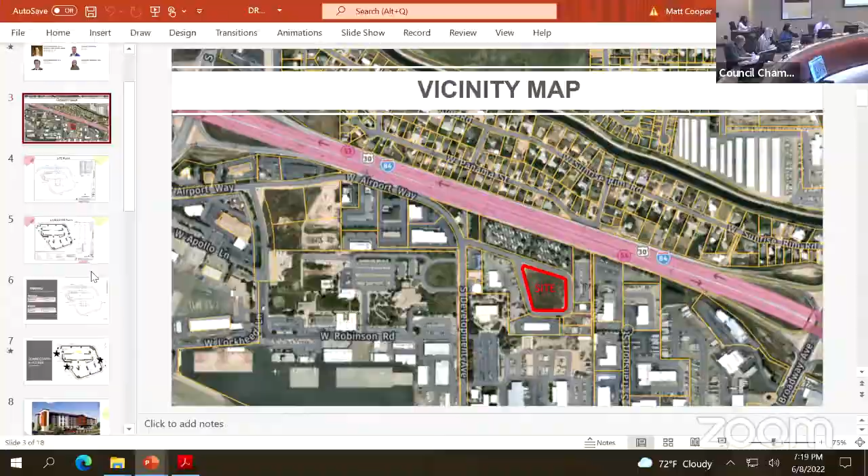Seeing none for that, I'll close the public portion of the hearing and turn it over for comments and a motion. Mr. Chairman. Yes. I'm not sure who to address this to, if it's Josh or our attorney, or perhaps you can answer this.

But the concerns that were presented to us, it seems to me, are planning and zoning concerns or ACHD concerns, and we are DR. I don't know what to do with that.

Mr. Chair, Committee, yes, Member Zuckerman, we do review on-site circulation, and we generally take ACHD's discretion regarding their traffic analysis in regard to roadway improvements, which they haven't required any roadway improvements besides the sidewalk and curb and gutter improvements. In regard to the use, it is allowed. We don't have anything that would require a reduction in size of their proposal. Thank you.

Mr. Chairman and committee, yes, members, I'll just jump in real quick in regards to the noise standards. City of Boise noise ordinance is a function of the police section of code, so they deal with all noise complaints. There is, though, very limited language about noise in the City of Boise code - it really only addresses amplified music. So machinery and things like that are not a basis of a noise complaint. So the businesses affecting the hotel is not something that is addressed or applicable under Boise code. I just thought I would clarify that real quick. Thank you.